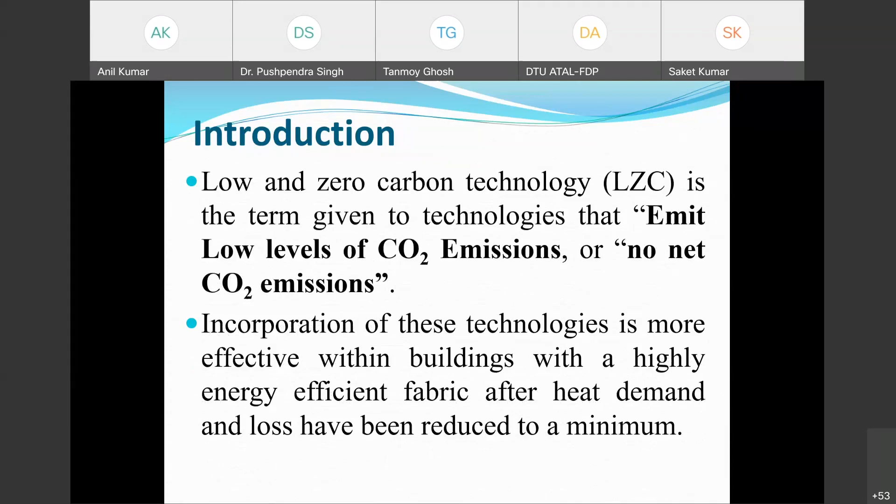Low carbon power is electricity that produces substantially lower greenhouse gas emissions than conventional sources. Renewable or green energy sources, including nuclear power, are all fine for low emission purposes, whether it is solar energy, biomass energy conversion, wind energy, or whatever.

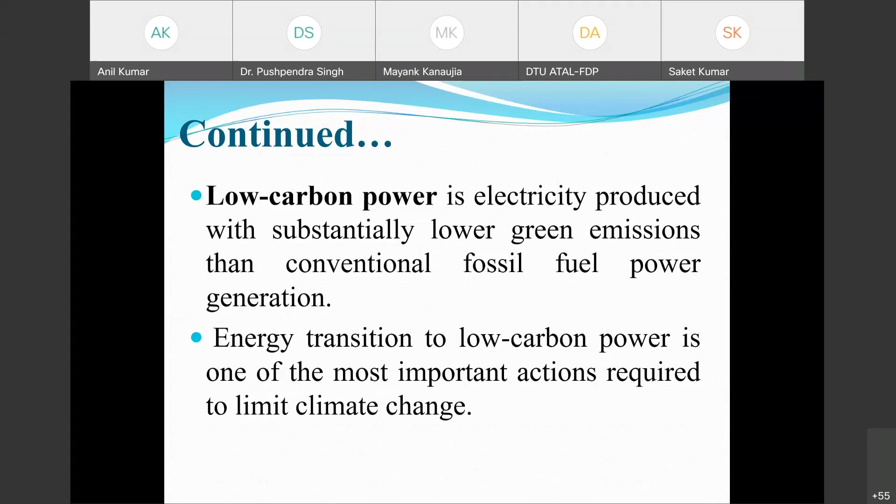Energy transition to low carbon power is one of the most important actions required to limit climate change. There are some definitions: zero carbon technology, carbon neutral technology, and low carbon technology. In the initial phase, our focus should be on low carbon technology, where up to 50% or more of carbon emission can be reduced.

The zero carbon technology: a zero carbon technology development is one that achieves zero net carbon emission from the energy used on-site, on an annual basis.

Carbon neutral technology defines technology that emits the same amount of carbon at the point of use as it takes in during its lifetime. Biomass energy conversion technology is the best example, because during its lifetime it continuously converts CO2 into oxygen. When the plant is dead, it emits carbon itself through direct combustion or other techniques, even gasification involves some carbon emission, but it is compensated during its lifetime.

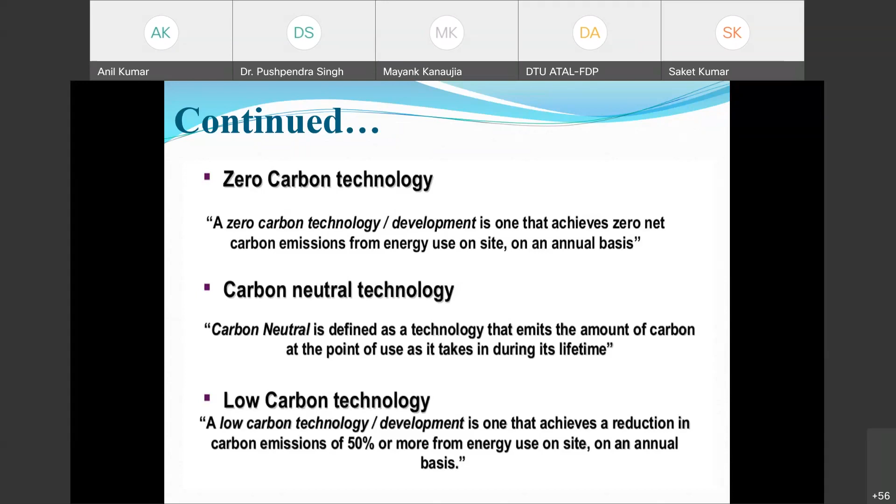Low carbon technology is technology development that achieves a reduction in carbon emission of up to 50% or more from the energy used on-site, on an annual basis. This target can be easily implemented or achieved.

Some examples of zero carbon technology: solar energy conversion technology, whether the solar thermal route or the solar photovoltaic direct energy conversion route, wind energy, ground source heat pumps, and hydropower.

We can consider these zero carbon technologies, but in actual practice, embodied energy is associated with manufacturing the device itself—whether it's the solar energy conversion device, wind energy conversion device, ground source heat pump device, or hydropower turbines and other equipment. A lot of energy is consumed during the manufacturing of their different components, so we cannot ignore that.

For example, take solar water heating systems. They have different components: an energy storage unit or tank, and a solar flat plate collector, which could be focusing or non-focusing type. The flat plate collector is a very well known technique for solar water heating, and you may see it on rooftops along with solar photovoltaic systems in hostel buildings, commercial buildings, hotels, or hospitals.

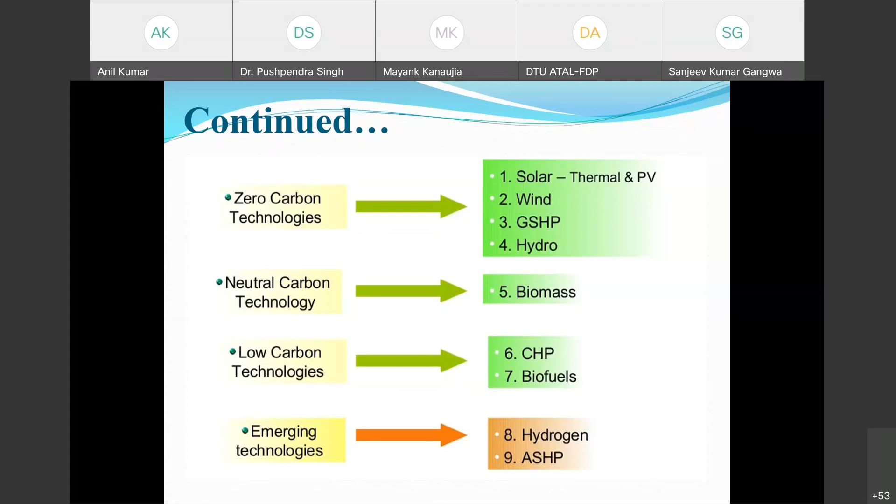And this technology worked in ancient buildings itself, 200 or 300 years back. The kings in the palaces implemented this technology. Air tunnel cooling systems are provided in the Jaipur palace, and many more palaces in India, and also in other parts of the world.

So now, low carbon power generation sources include wind power, solar, nuclear, and most hydropower. Of course we consider this low carbon power instead of zero carbon power, because in hydropower a huge amount of energy is again involved during construction of dams, and rehabilitation, and the ecosystems are also disturbed.

I remember the Tehri Dam hydropower project. It was started in '74, but the first commissioning of the first unit was only in 2004, so it took more than 25 to 30 years. Because of some social movements, like the Sundarlal Bahuguna movement and other environmentalist movements, and the gestation period being very high, initially only 10,000 crores were sanctioned, but how many multiples of that 10,000 crores were spent during construction, we don't know.

The term largely excludes the fossil fuels or conventional fossil fuel, coal, and other fossil fuels also as a plant source, and is only used to describe the particular subset of operating fossil fuel power plants, especially those that are successfully coupled with flue gas carbon capture and storage systems. This definitely helps a lot in reducing carbon emissions in conventional systems.

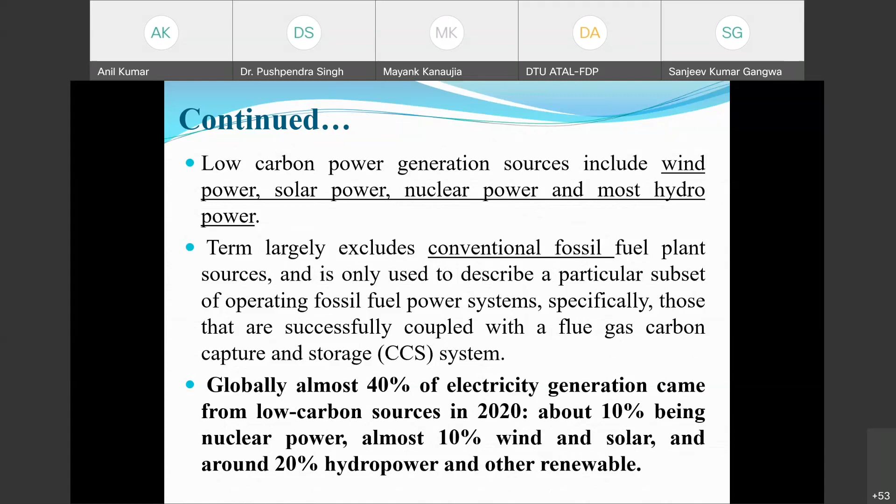Energy production and use accounts for about 3/4 of the globe's greenhouse gas emissions, making it the most important element for the net zero emissions strategy for many countries. There are three main strategies which can help a country meet its energy demand with zero carbon emission: optimization, electrifying, and decarbonization. These are the three things.

All countries need to do it - reduce the energy use through improved efficiency. So we have to improve the energy efficiency.

Now these days, you might have noticed some star rating is there. In India, the BEE is responsible for that - 3-star, 4-star, and 5-star ratings are there. This star rating is basically about energy efficiency only.

Shifting energy demand to electricity and away from the combustion of fossil fuel is electrifying. Shifting entirely to zero carbon technology to generate electricity is decarbonization. These strategies are needed in all the major energy using or energy demanding sectors - building, transportation, and industry.

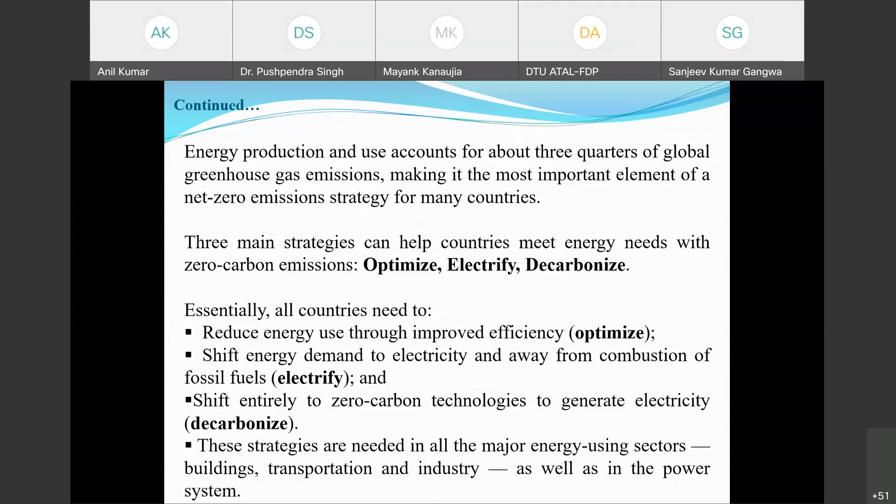Now there are some important factors behind decarbonization: investment in energy efficiency. A good amount of investment is needed for energy efficiency, because if we want to improve efficiency for domestic use, we need to replace many old products. And many times we have to take care of our economic condition also.

Hydropower and investment in non-hydro renewables - this large capacity hydropower system is again somewhat problematic, but small scale or mini-micro level hydropower is fine, which we can do with minimum investment.

This investment, or say the energy for the construction of a big dam, means cement is needed, iron is needed. These are in another way just the energy form of some energy itself.

Growing wealth and economic modernization lead to electrification of the energy sector, because energy demand keeps on increasing day by day. Just look at your domestic level itself. Now almost all medium class families have a microwave oven, but 15 years back it was not there. All medium class families have a mixie or mixer grinder in their home, and many more home appliances are now totally dependent on electricity, because electrical energy is a more convenient form of energy.

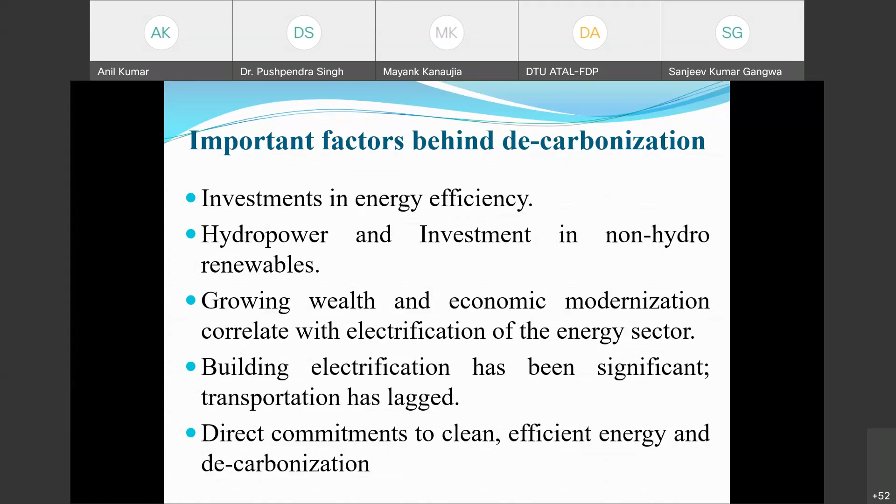Another very promising technology is solar desalination. It is used to desalinate water, and that water you can drink after mixing in some minerals, so that we can use it. This is the low carbon philosophy, and all the literature reflects it.

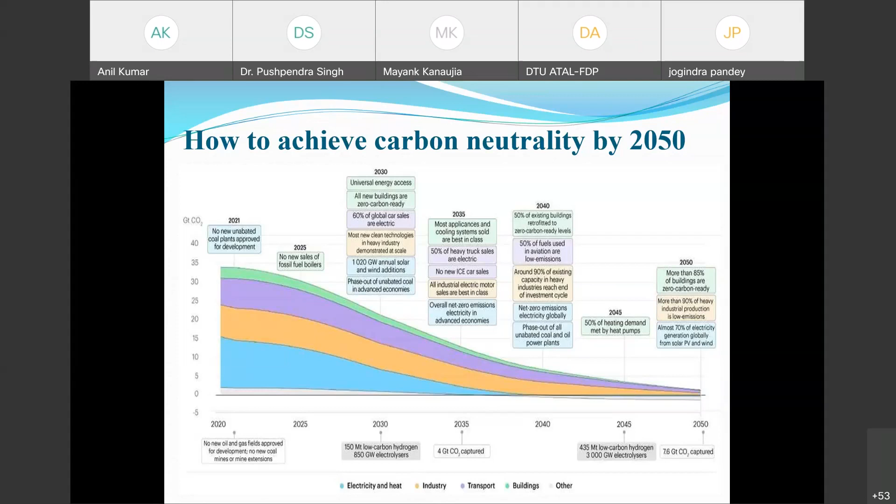In many countries, this has already been implemented, and governments are running phases of the low carbon emission technology program. Basically there are three phases. So the low carbon emission technology program includes three phases to promote the transfer of low carbon technology.

First, develop selection criteria to initially identify and screen technology that could be replicated and have repeatability demonstrated. Conduct a feasibility study to identify the LCET based on current technology and socio-economic needs. That is very important. We have to take great care, before implementation of any technology, of the techno-socio-economic needs and study thoroughly how it will impact society.

One research paper we have written has already been accepted, in energy social science. There we studied the impact of the CSP system on society and how these are being distributed, so it is in the production phase. One of my UG students did that study, and it is a very nice study with good impact factor, and it has been published.

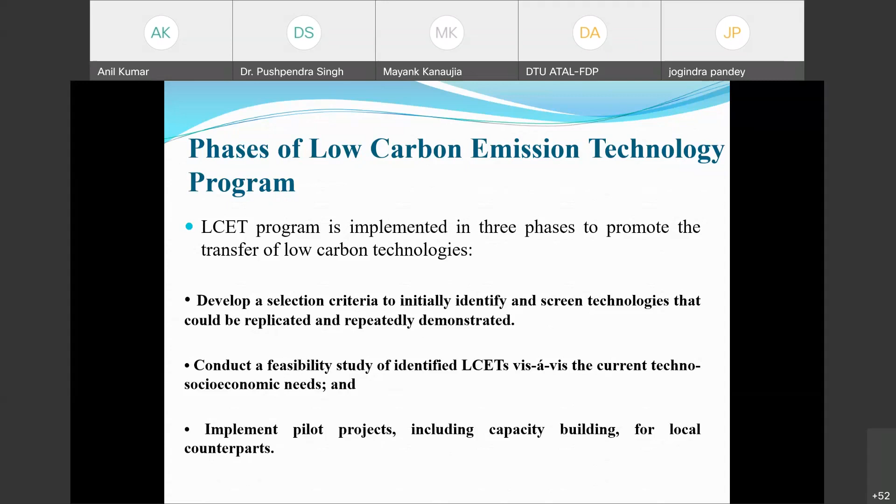So implement pilot projects, including capacity building at local counterparts, especially in buildings, how we can implement this zero carbon technology. We need to use technology in buildings so that CO2 emission gets closer to zero. There are a number of technologies that can heat buildings and emit low carbon.

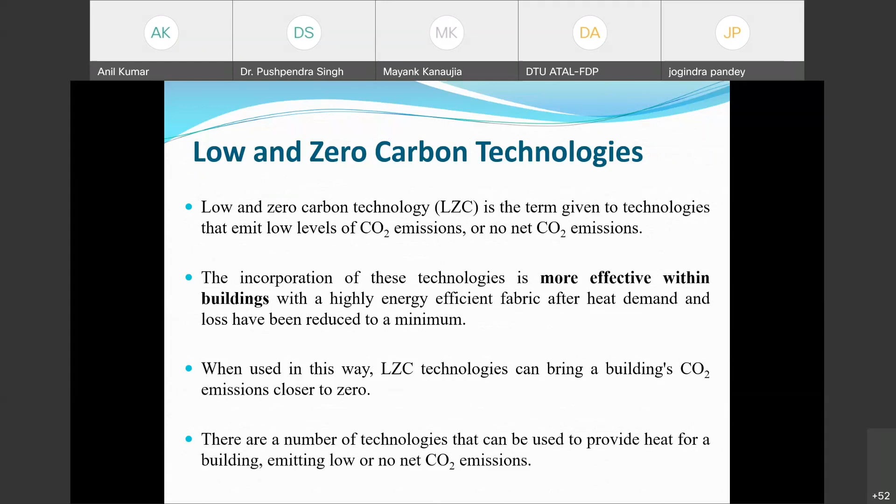Now the solar water heating system, I already gave this example, and in India, a tropical country, we may not need hot water for domestic purposes. However, in hotels, hospitals, commercial uses and industry itself, hot water is needed round the clock. So that hot water can be achieved with the help of solar energy, and solar thermal technologies are the best for that.

Air source heating, ground source heat pumps for heating and cooling, and not only heating and cooling but also for power production. Organic Rankine based cycles are there, and we have published few papers on low temperature based organic Rankine cycle power generation. We are also studying this for some hilly regions, and one of my students is doing modeling work for this heat pump.

Combined heat and power is another very important technology, implemented since the last decade, and it makes the system more and more efficient, closing to 90% or 95%, because both heat and power are utilized.

For biomass heating, we have efficient gas boilers, that is fine, the gas boiler from biomass. Biogas, this is what is called the anaerobic digestion system. And solar photovoltaic system for direct energy conversion.

Help of the ground, very good design, ground source heat pump itself. Combined heat and power for the industrial aspect. The biomass heating could be implemented for the domestic as well as the industrial building. Energy efficient building for building.

Solar photovoltaic can be utilized, meaning the roof generally, if we have empty space on the rooftop, we can easily implement the solar photovoltaic systems. And these days the solar photovoltaic system, if some excess energy is produced, that is directly fed into the grid.

So smart metering is there. Whatever the generation is there, that will be directly deducted from your main power consumption meter itself, the metering system.

And this wind turbine on the peripheral wall, or some wall, small turbines we can use, where we can install small turbines. A number of small turbines we can use in the perfect direction. So definitely, though these are small turbines, they could easily replace your lighting load. The wind turbines are sufficient to replace your lighting load itself.

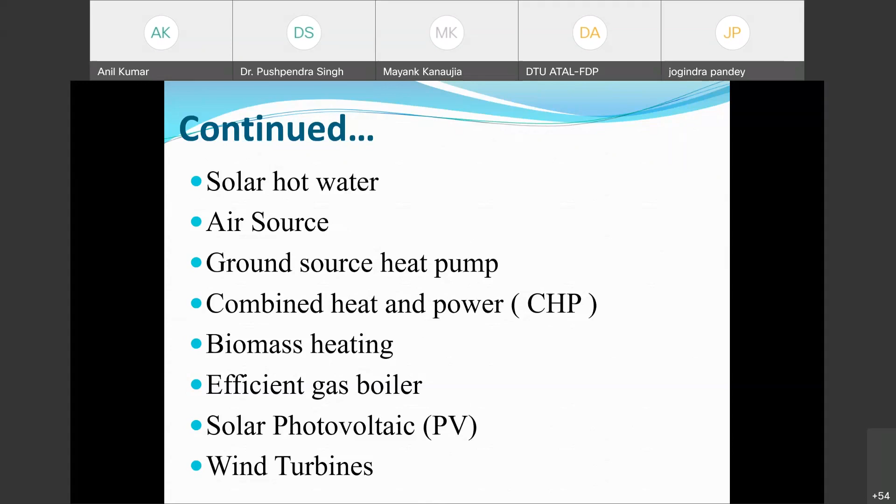So solar water technology, some studies out there. Installation main component, installation consideration, cost.

And 40% efficiency with the evacuated collector. These are able to generate water of 150 degrees centigrade. A little bit more expensive, but more efficient, because the radiative losses are reduced with the help of the two concentric tubes that are there.

So heat transfer system, the hot water system, heat transfer system, or the water pumping, all of that. Most of the systems work on the thermosiphon effect only, thermosiphon based, natural convection based. The hot water cylinder, this is the storage of the hot water system. So these are some of the components.

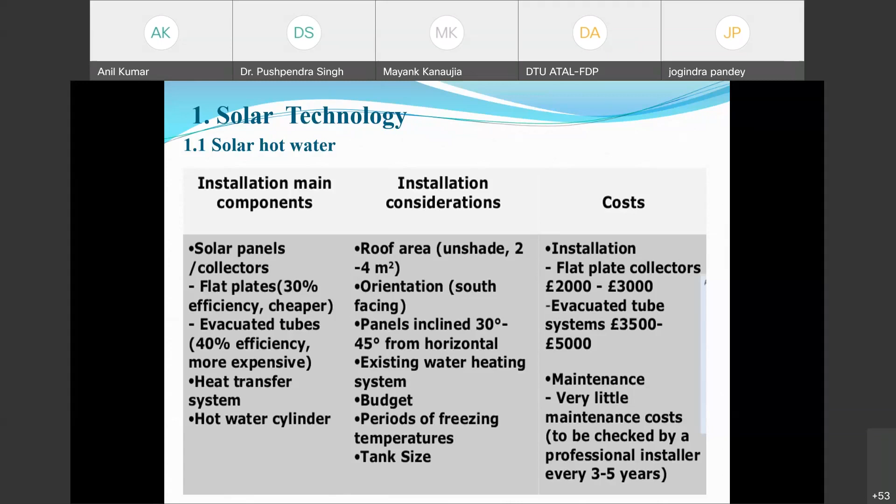Nothing will be changed, only the gasket. Sometimes the gaskets become very hard, and maybe sometimes the glass is broken by monkeys or other negligence, and some leakage could occur. Other than this, there is no massive problem, so we can say the maintenance is very little, maintenance cost is very less. This is one of the perfect examples of zero emission technology for implementation anywhere, whether domestic, commercial, or industrial building.

So this is the same thing. The 50 to 70% of the water heating, which is spread out, approximately 90% is summer and 50% is spring. Lifetime 30, I have already discussed.

Payback period is a very important thing. Over here they have written 7 to 9 years - this is for European countries. But in India this is quite less, not more than 3.5 years, even in extreme cases.

So environmental benefits - of course this is a very important slide. Environmental benefit, the CO2 benefit is 400 to 750 kg per year, the average installation about 10% of average household emissions. And this LCBP, the possible local council grant is defined for this, from the UK point of view.

Solar photovoltaic systems: PV array, inverter, DC-AC conversion, metering, inverters, and solar charge controller if batteries are present - the charge controller.

But you will not believe, 10 years back, or even 5 years back itself, for solar photovoltaic systems the battery was a very essential component. And the cost of the battery was around 35% of the total cost of the system.

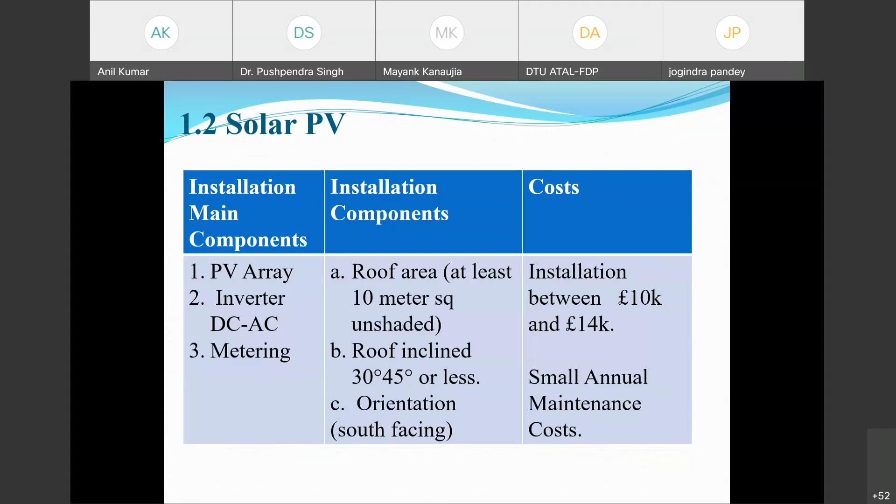And of course, there is no maintenance unless some breaking occurs, and hot spots generally are there - though now hot spots are also very rare. Earlier it was a very common thing because of overheating, but now it can be bypassed. The same system can keep working. Earlier, if a hot spot was generated in some solar photovoltaic module, we had to replace the whole module, but now it can be bypassed easily.

1 kilowatt peak - generally solar photovoltaic systems are measured, the capacity is measured in watt peak. If a 1 kilowatt power generation system is installed, it will generate 1 kilowatt of power when the solar radiation value is 1000 watt, and the ambient condition must be around 25 degrees centigrade.

Another very important thing is air mass ratio - it must be 1.5 AM. So under this condition, the solar photovoltaic system will generate 1 kilowatt of power. So that the smaller system available will produce 750 kilowatt hours of electricity.

Though the power is generated, the 1 kilowatt peak capacity is there, but there are some losses also, some leakage losses also. So 25% you can consider the losses. So net energy at the terminal.

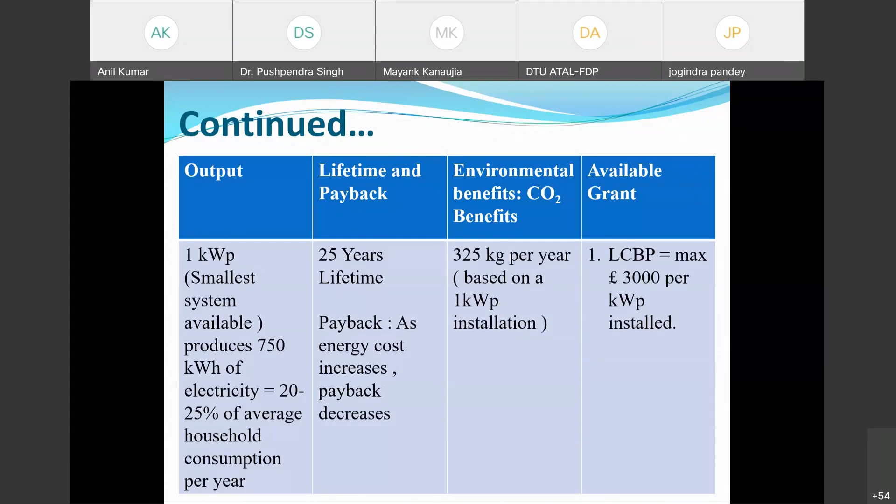This is for UK for the current. Now the wind energy, another installation: the wind turbine, mast, inverter, battery storage, off-grid system. Installation consideration is average wind speed must be 5 to 7.5 meters per second. And now there are some turbines available which can work at 3 to 5 meter per second also.

Planning issues: visual impact, noise, and conservation area. This is another very important thing with wind energy. Some ecosystem disturbance is there because of visual impact and noise. They are also responsible for bird killing, and possible building survey issues due to increased pressure on the fabric of buildings.

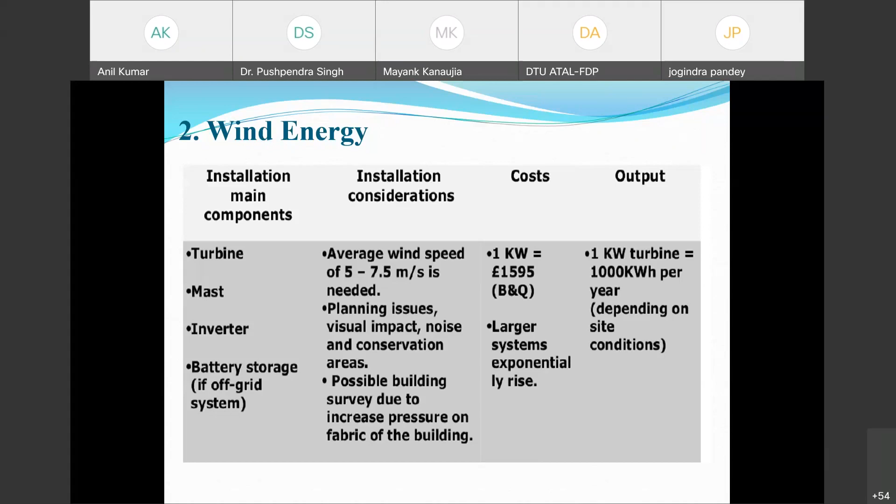So that is the cost, and for the largest system it rises exponentially. A 1 kilowatt turbine produces 1000 kilowatt hour per year, depending on site conditions, so that is availability of wind. Lifetime and payback period: lifetime is again 20 years, and payback is unlikely to cover the full cost during the lifetime, but likely to improve with energy cost rise.

Environmental benefits are also there: 0.5 tons per house per year, meaning over 20 years, suppose the system cost and system life is 20 years, so this much carbon can be reduced.

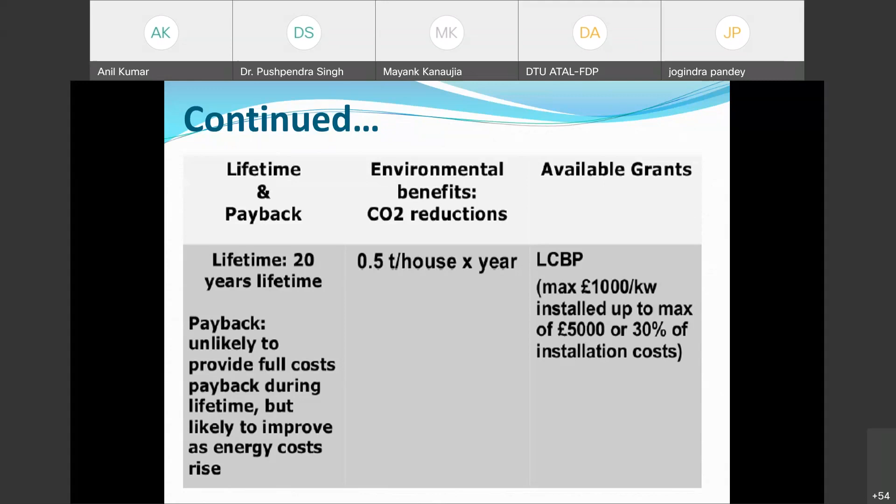Ground source heat pumping systems are also another very important option for heating and cooling potential. The ground installation and main components are the ground loop, and deep bore drill, which could be vertical or horizontal type. The heat pump contains the evaporator component, compressor, condenser, and the heat distribution system under the floor or standard radiators.

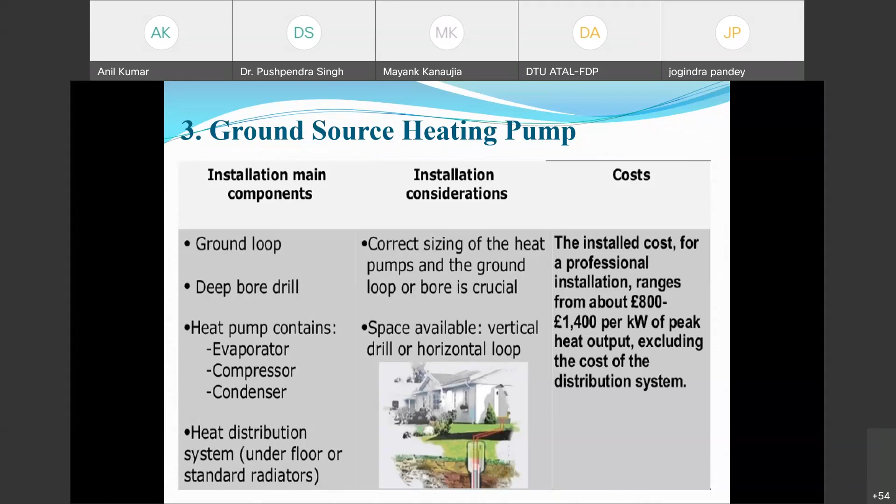Correct sizing is an important installation consideration. If the heat pump is oversized, then the cost and energy consumption will be higher, so we have to optimize the sizing. Also, the ground loop or bore is crucial, and space available for the vertical drill matters too.

This is for full house heating under the floor, and floor heating is more efficient than radiators. The life is 25 years, payback is 9 to 10 years. But in India, because we have very favorable conditions, the payback period is quite less, meaning 6 to 7 years over here.

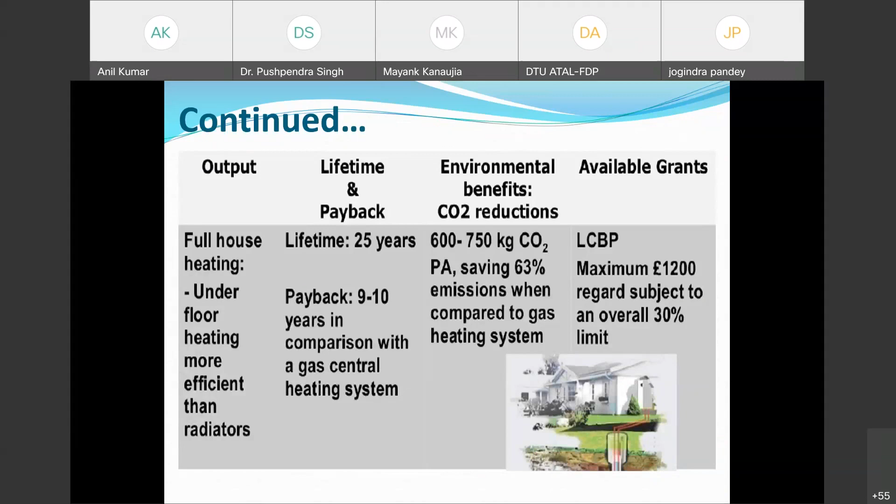Environmental benefit: 600 to 750 kg CO2 per annum saved, 63% emission reduction compared to gas heating. In European countries and most countries where the temperature is very low, they use gas heating systems, and compared to that, almost 63% emissions is reduced.

So small hydro: again, this is average worldwide, 100 kilowatt cost around this much. No CO2 emission at all. In lifetime, you can see the life of the dam is more than 35 years. So overall, you may consider there is no CO2 emission with small hydropower.

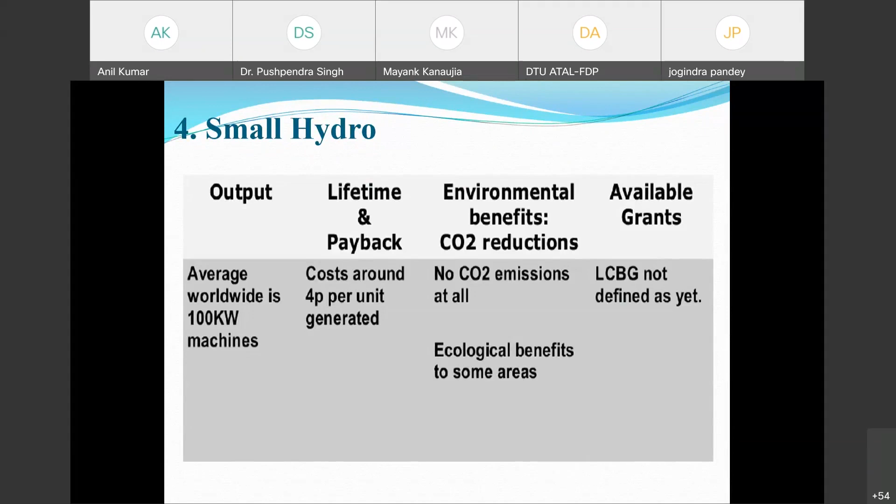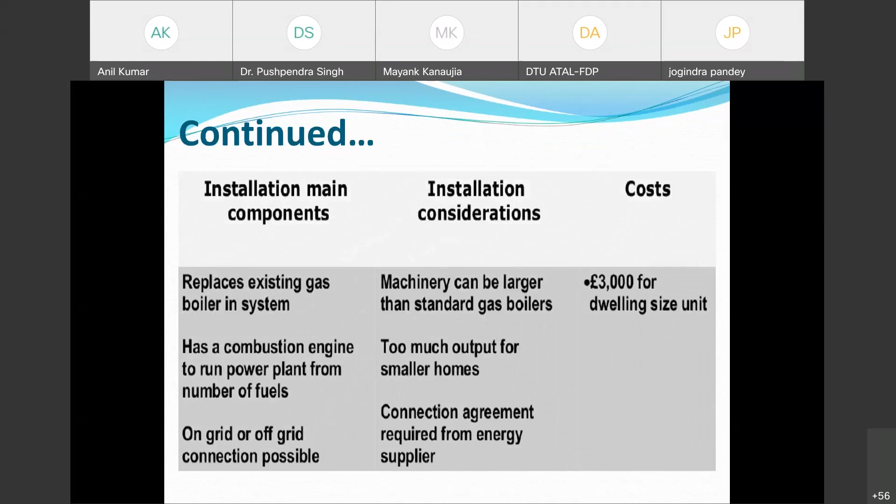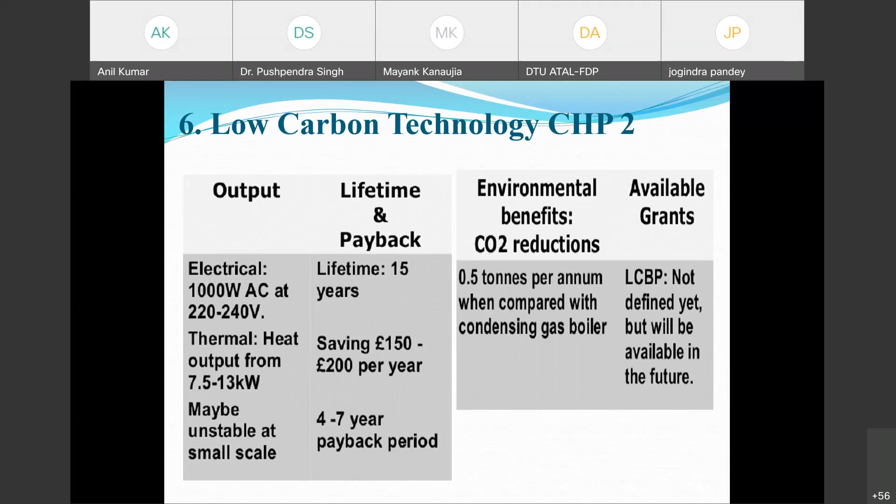I should skip some slides because I want to say some other things now. These are all basically important.

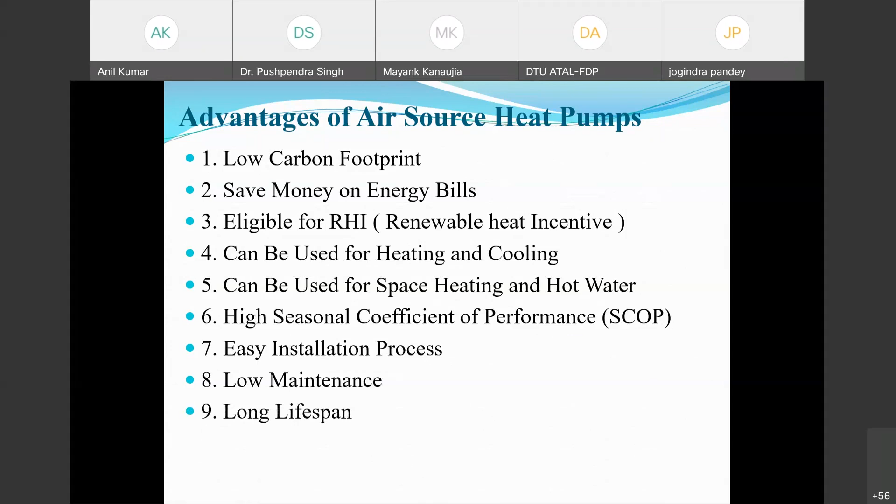Air source heat pump: low carbon footprint, saves energy and energy bill, eligible for the renewable heat incentive, which can be used depending on government policy. Renewable heat incentives can be used for heating and cooling, for space heating or hot water, high seasonal coefficient of performance, easy installation process, low maintenance, long lifespan, no fuel storage needed.

This methane itself, the methane from this anaerobic biogas digestion process, that you can generate.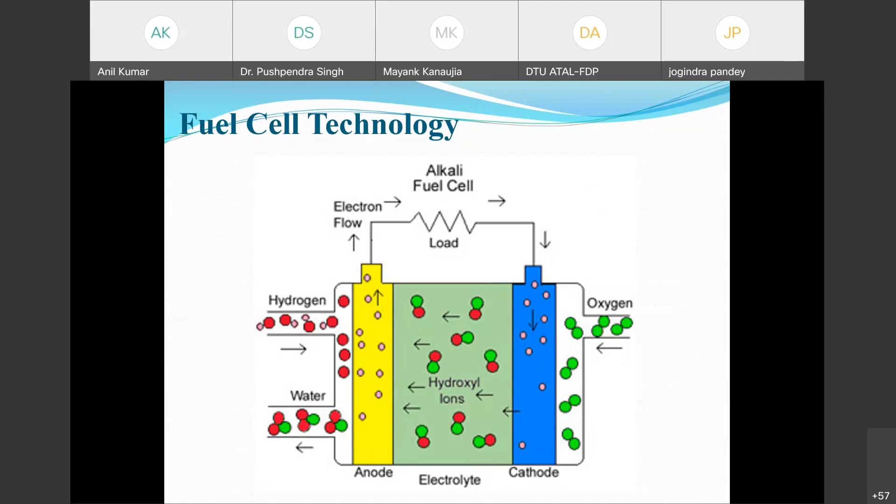Sooner or later it will be opted, because these are all low carbon technologies, right?

Now the question comes: India is a developing country, and not only India, many African countries and many more Southeast or South Asian countries need huge amounts of electricity, basically energy needs, because we are in the developing stage, right? Let's just look over here.

This was the installed capacity at the time of independence, in 1947. We were generating power of 1360 megawatts only, for 30 crore people at that time.

But now there are more than 130 crore people, and right now our power generation capacity is more than 3.5 lakh megawatts. That is our installed capacity right now.

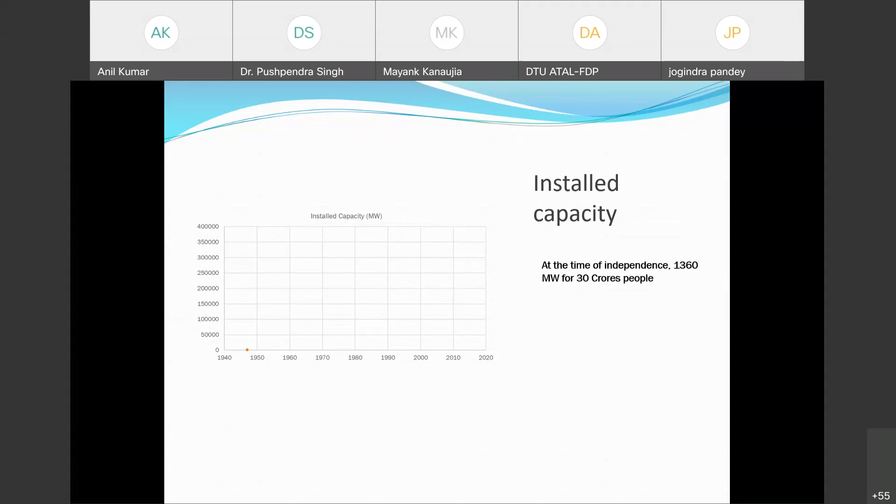So now how is the pace? The installed capacity has increased from 1947 to 2020. In fact, this is very recent data: 3,83,373 megawatts is the installed capacity we have as of May 2021. So that is basically exponential growth.

And this growth is because of the development only. So if someone says we have not developed in the last 70 years, I think that is not a proper statement.

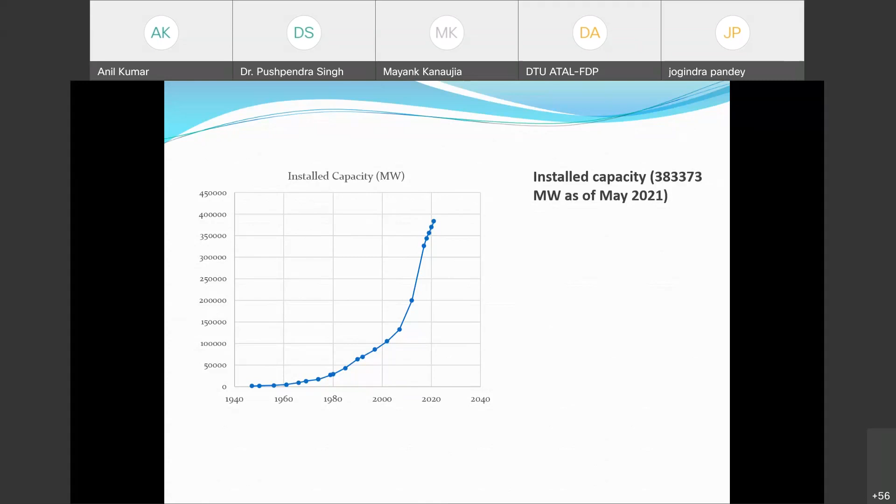Because energy demand keeps increasing, our installed capacity keeps on increasing. Demand is increasing not only in the domestic sector but also in the industrial sector, and more than that in the industrial sector itself, it is one of the most energy demanding sectors. So our nation's growth highly depends on industrial development only. All the modernization is because of our industrial growth only.

Now just look over here. This is the installed capacity of various types of power plants: coal and lignite 53%, gas 2%, diesel 6%, hydro power 2%, nuclear 12%. And RES now has quite a respectable figure, 25% of the total installed capacity.

But in the next slide you will be a bit disappointed. Though the renewable energy installed capacity is 25%, in actuality we are generating only 10%. Less than 50% of our installed renewable capacity is actually being generated. This is quite disappointing, and it's because of the low power factor, which includes maintenance. We do not do proper maintenance for the renewable systems. This is another problem.

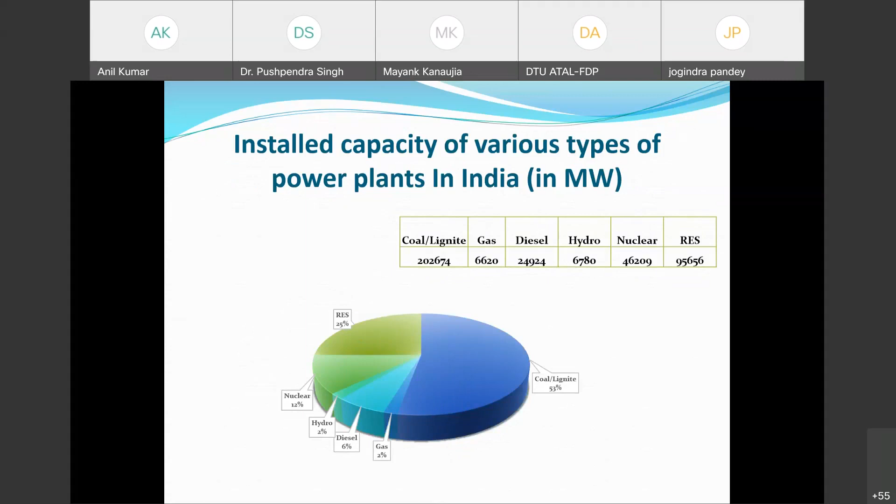This is the power generation in gigawatt hours, while that was the power generation in megawatts for installed capacity. So the coal and lignite share is almost 72%. Just look over here: the coal and lignite installed capacity is 53%, but the actual power generation percentage is quite high, at 72%. That shows how dependent we are on coal or fossil fuel, coal or lignite based power.

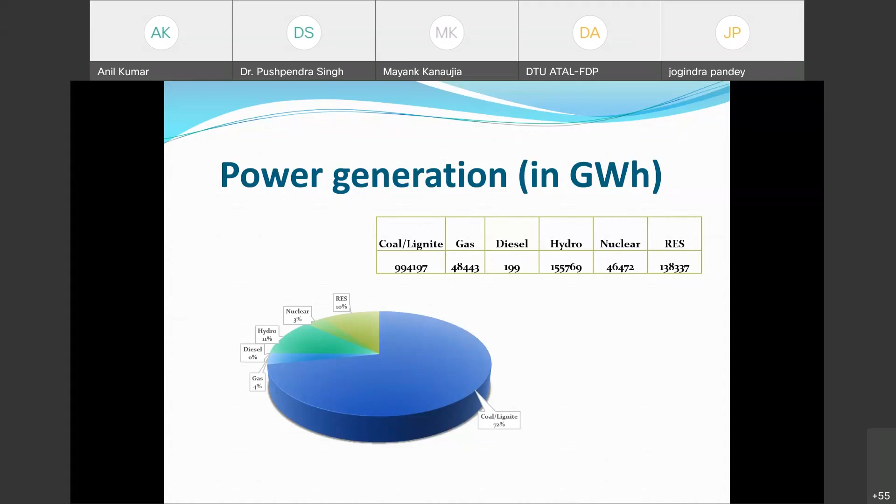Because of that reason, I was saying we cannot replace coal-based power plants with renewables or any other green energy, because though nuclear energy is quite a promising energy source, the safety concern is there. A lot of safety concerns are there. That is another problem with this.

Now you just see this is the growth in per capita electricity consumption, right?

At the time of independence in 1947, we had only 13 kilowatt hour per capita energy consumption. But now it has reached almost 1200 kilowatt hour, as of the end of October 2020. Of course, our population has also increased proportionally, but it's still quite a satisfactory figure. Though we should have more than that to come under the category of a developed country, we definitely have to increase the per capita energy consumption.

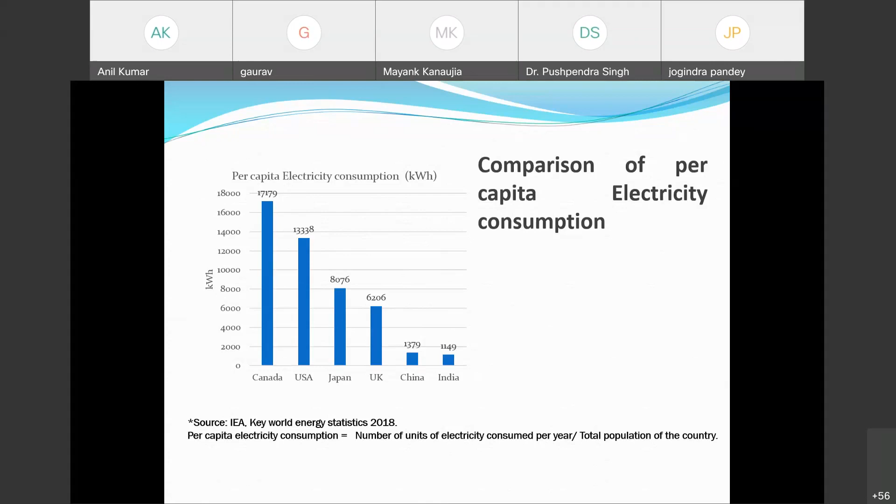Of course there are problems: emissions of greenhouse gases, acid rain, general destruction to the environment. A 500 megawatt plant will produce 10,000 tons of sulfur dioxide, 10,200 tons of nitrogen dioxide, and 3.7 metric tons of CO2. So we have to take care of all these concerns before adopting coal.

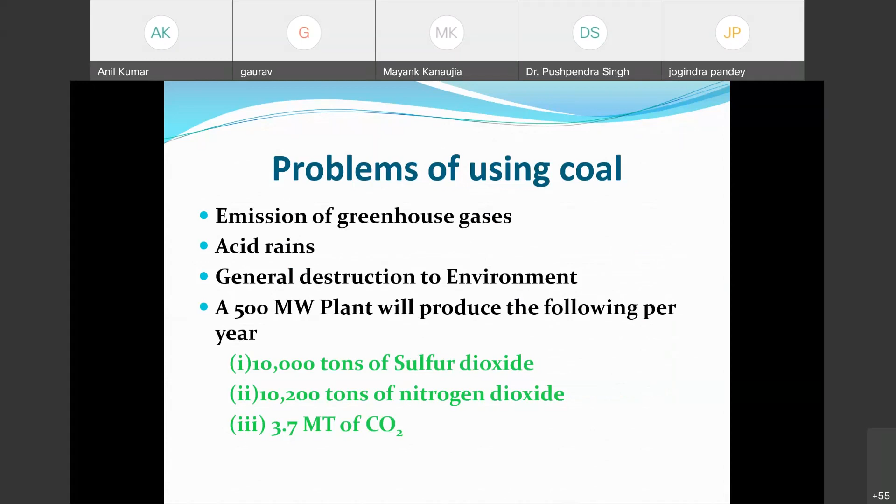In India, thermal power plants emit 1,646 metric tons into the atmosphere. Some regulations are also there because of international pressure, because of the Paris Climate Change Agreement, and the Ministry of Environment, Forest and Climate Change also implemented some rules and regulations to reduce greenhouse gas emissions. We have to maintain the global temperature.

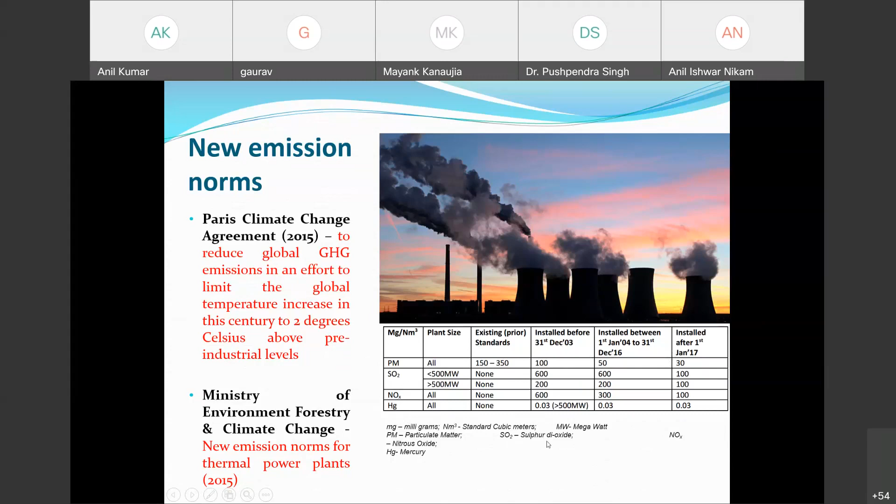Now you can see the difference here: this is the particulate matter (PM), sulfur dioxide, NOx, and mercury vapors, for all plant sizes in 2016-17, compared with before. There are PM levels, SOx and NOx, and some regulations around these.

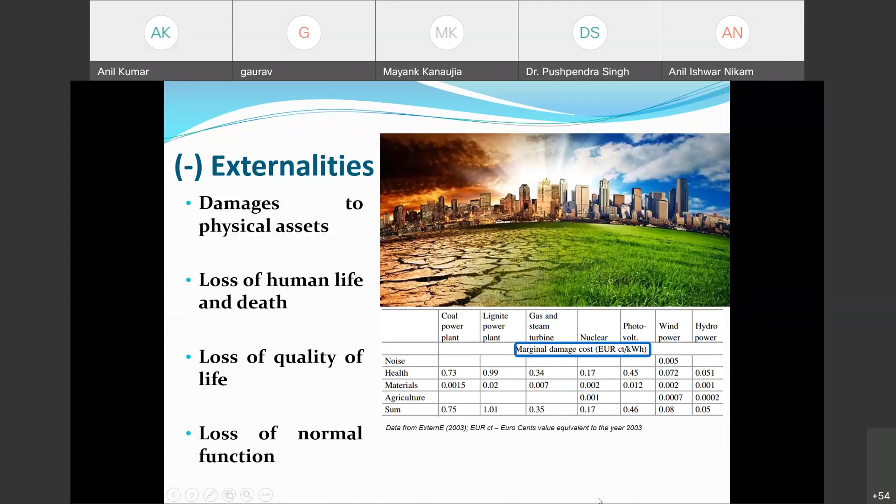Market failure, that is okay. Now the levelized cost of electricity for solar is 2.7 to 3.2 Indian rupees per kilowatt hour. Earlier, I remember about 20 years back, this cost was around 17 rupees per kilowatt hour for solar. So in the last 15 years, there's been a huge decrease in the cost of power production from solar photovoltaic systems.

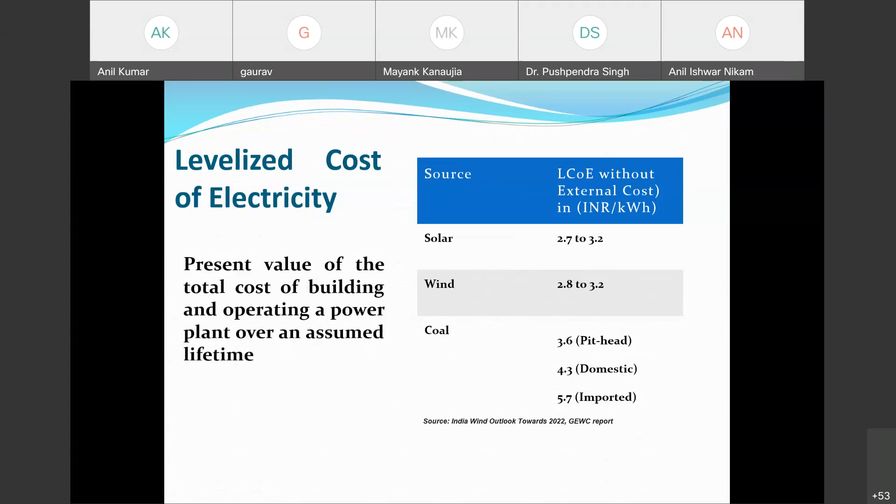It could be the solar CSP or the wind, 2.8 to 3.2. The coal, pit head, domestic and imported - that depends on the pit head, domestic and imported. We are also importing coal from Indonesia or Australia because we do not have good quality coal. Our coal has higher ash content as compared to others - this is another problem with our coal. So now this is how this cost is decreasing.

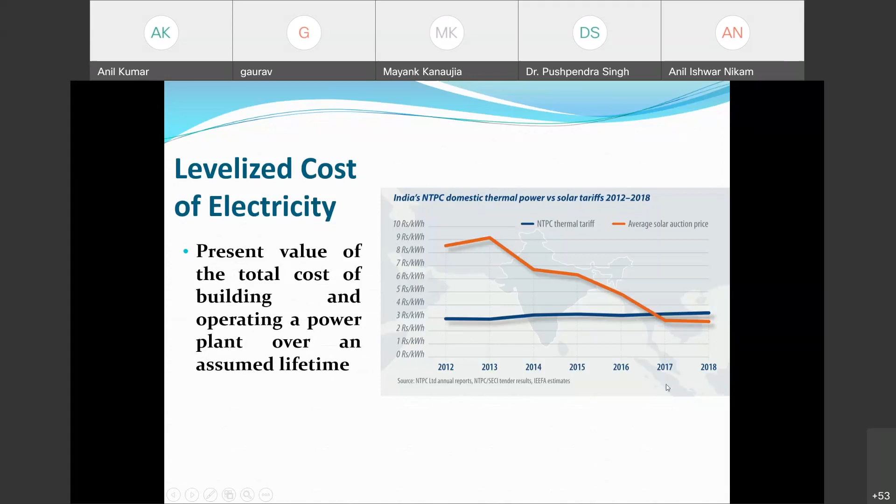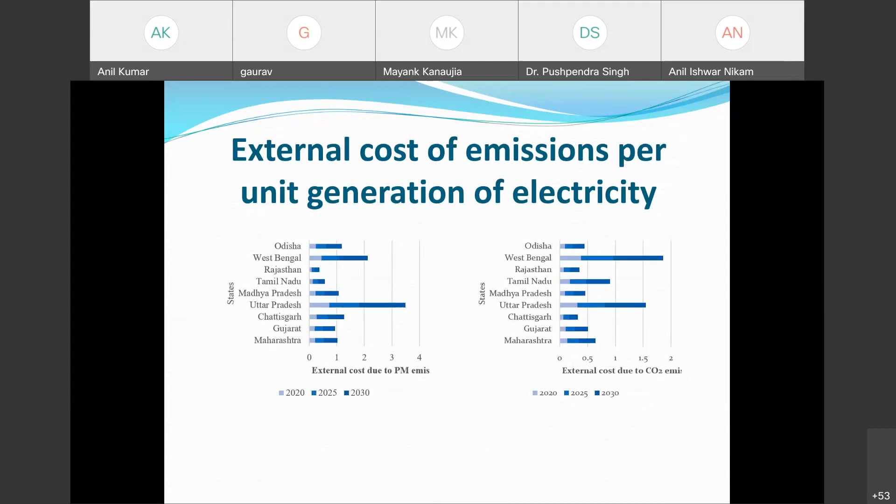So these are the 9 states - this is the external cost of emissions per unit generation in India. The study has been carried out for SOx, sulfur dioxide, NOx, particulate matter, and CO2 emission.

So now the pollution control strategy - solar PV is eco-friendly. Of course, the price of silicon solar cells keeps going down, and because of that, power generation from solar photovoltaic systems is very less costly now as compared to 20 years back.

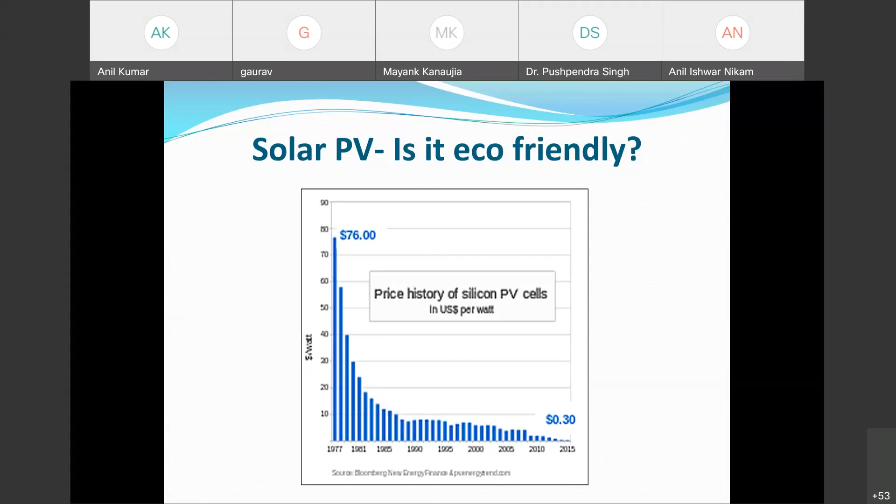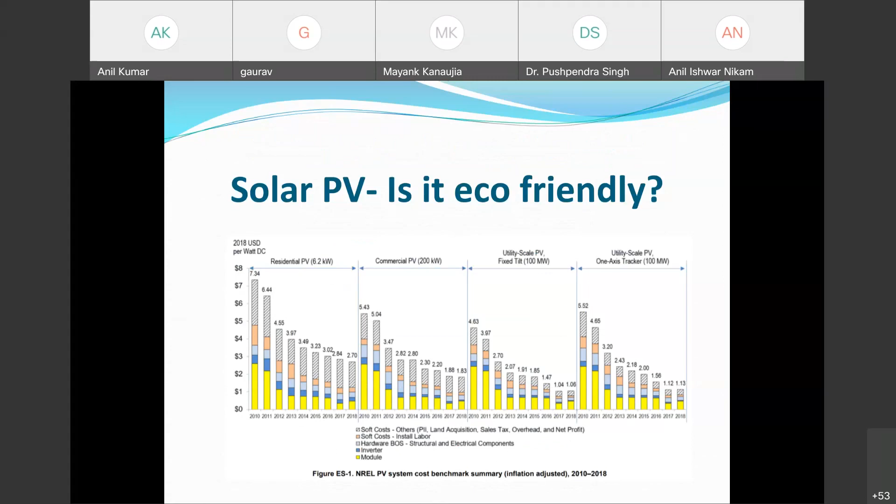Solar photovoltaic system - is it eco-friendly? You may consider this statement only partially correct, because during the characterization or fabrication process, lots of chemicals are released, and that may cause environmental degradation. So this CSP, the concentrated solar power, could be the future of India.

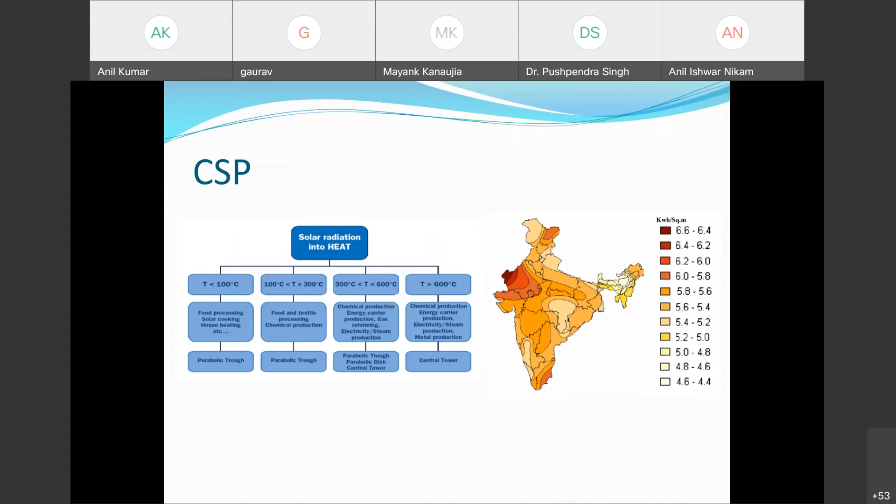So solar panel - is it eco-friendly? Yeah, the solar panel recycling market is also there. 37% of EOL market value is glass, because the materials involved are glass, aluminum, metal, plastic, silicon. These materials can easily be recycled.

So renewable energy, solar thermal - this levelized cost of energy needs to be reduced. High temperature material is to be developed. Definitely at high temperature, material start corrosion is there because of the CSP system - this is a major problem. Some new materials need to be discovered. The efficiency of the unit needs to be increased - definitely in some way we can increase efficiency, scope is there. External cost needs to be considered in the implementation.

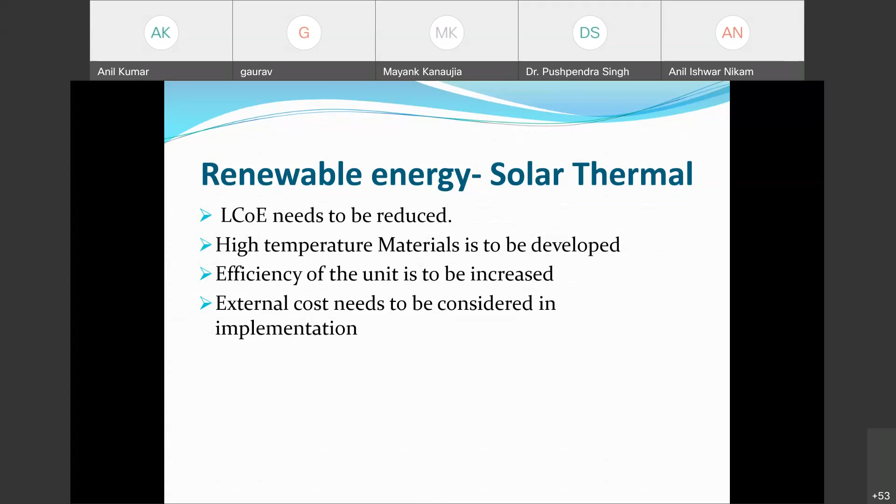So this is the base load - if the base load is more than 12 hours of storage, the CSP cost is like this. 1 cent is equal to 0.7121 rupees.

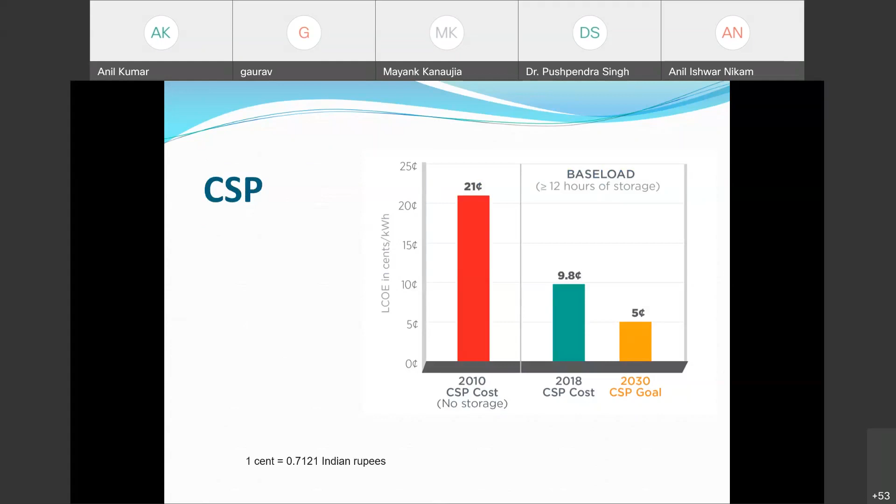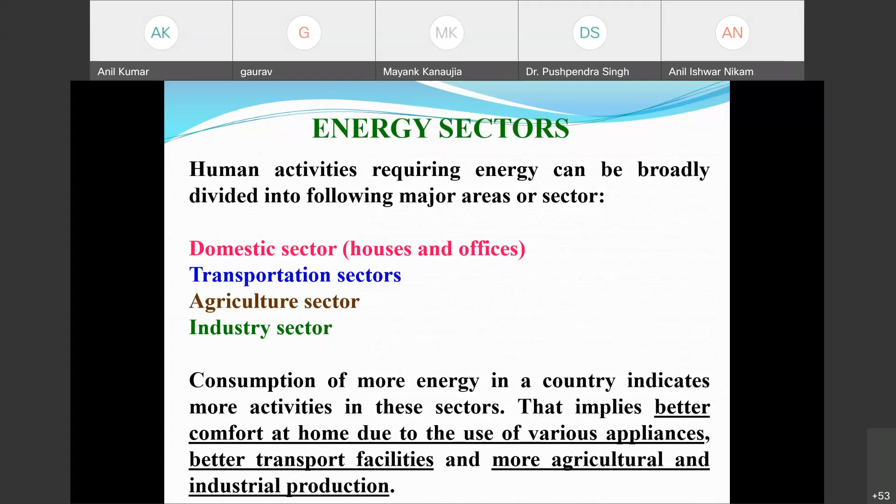In the industry sector, net zero emission means that energy sectors are generally domestic, transportation, agriculture, and industry sector. Just look at the slide - energy is a fundamental input, essential for advancement, modernization, and economic evaluation. This is whatever energy we are consuming for industrial development.

And in the industrial sector, one more important thing - total variation is 28 to 70, and on average we can consider almost 32 to 35% of entire global energy is consumed in the industrial sector.

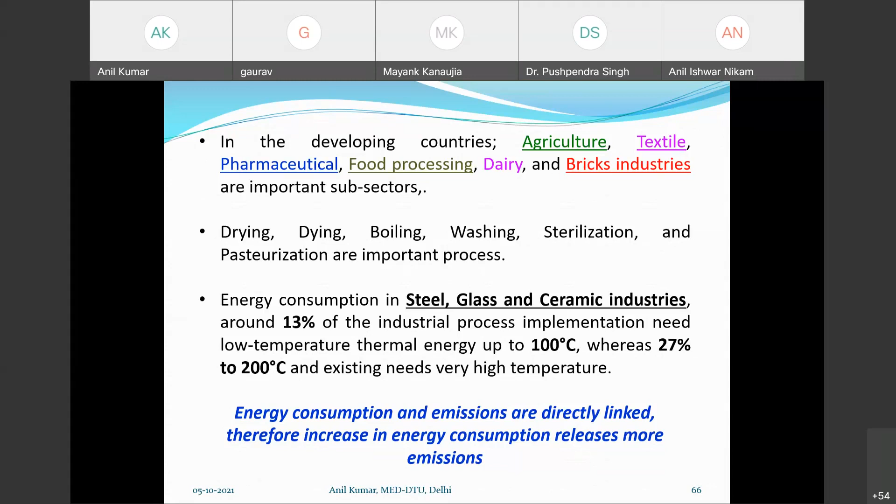Energy consumption in the steel, glass, ceramic industry - around 13% of industrial process implementation needs low temperature thermal energy up to 100 degrees centigrade, whereas 27 to 200 degrees centigrade. So energy consumption and emissions are directly linked, therefore increase in energy consumption releases more emissions, right?

So this I have already discussed.

This is the solar thermal energy conversion system. Everybody knows the collector is there. Storage, definitely - if solar energy is there, we need storage, then only the system could be made more efficient and reliable. If we have stored energy, we can use it as per our demand. And with the help of the boiler, heat engine can be done, or heat rejection, or secondary use, or mechanical energy.

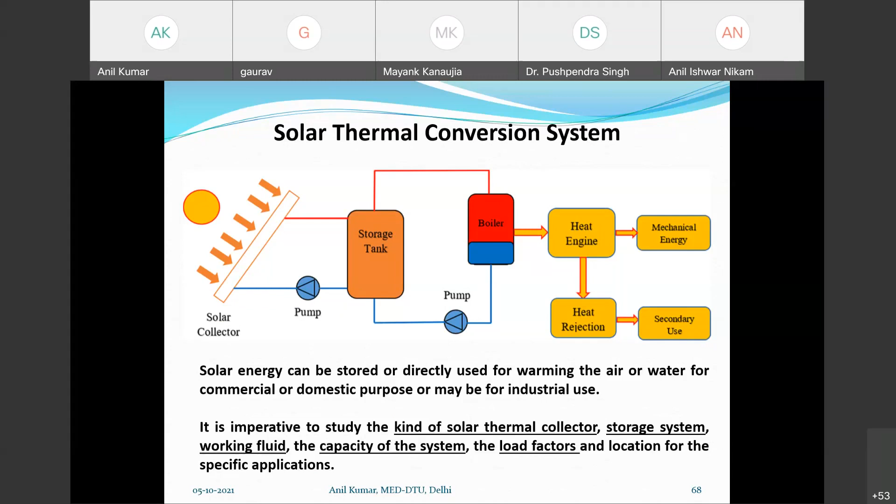That is all. Now this is a very important slide - various processes in different industries where solar energy can be utilized to fulfill the required demand. So dairy, tinned food, paper, textile, chemical, meat, beverage, flour and byproduct, timber product, brick, block and plastic - these are the different industries, right?

And many processes are very same - pasteurization, sterilizing, drying, concentration, the same. Some processes are different too. Paper industry is very energy intensive. Paper, chemical and textile are very energy intensive, but you will not believe none of the operation is carried out at more than 200 degrees centigrade.

Whether cooking, drying, boiler feed water and bleaching - in paper industry the bleaching, drying, fixing and pressing, in the textile industry also, almost none of the process is carried out at more than 170 degrees centigrade.

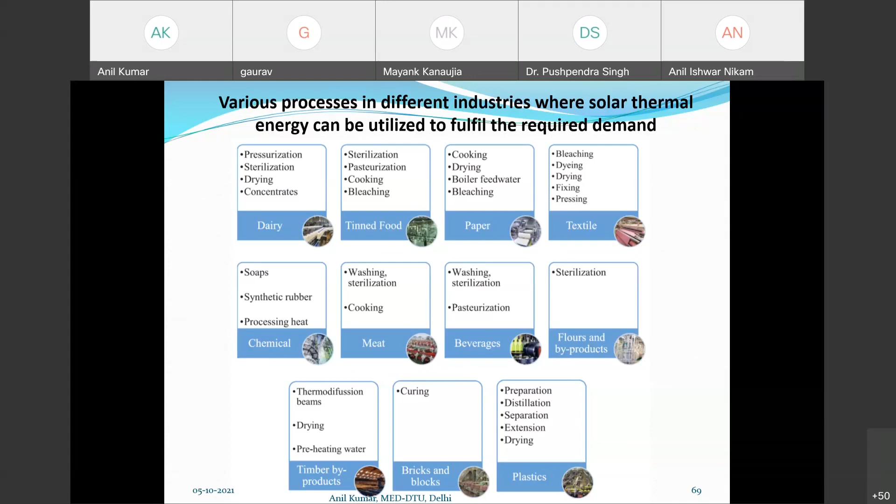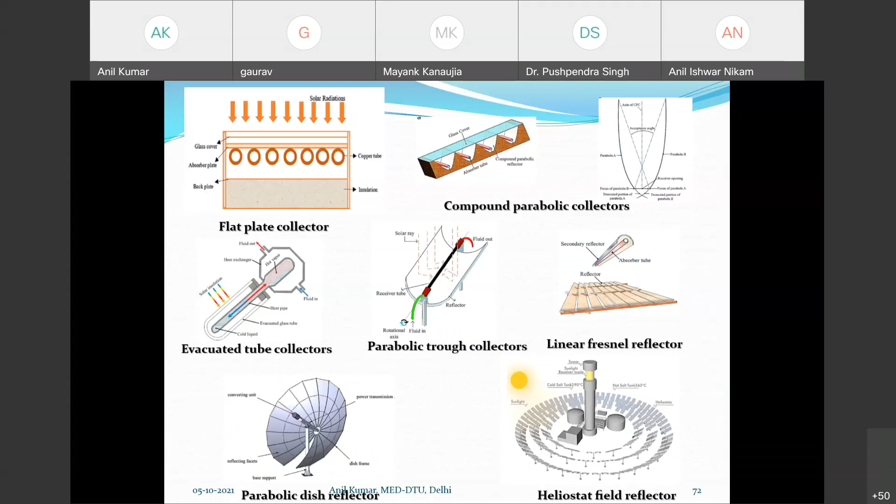I think this is very fundamental, I want to show this slide. With this slide, I just want to conclude.

These are the different solar collector technologies: FPC stands for flat plate collector, ETC for evacuated tube collector, CPC for compound parabolic collector, LFR for linear Fresnel reflector, and parabolic trough collector. So the maximum process demanding temperatures not more than 200 degrees centigrade can easily be fulfilled with the help of either flat plate collector, ETC, CPC, or LFR.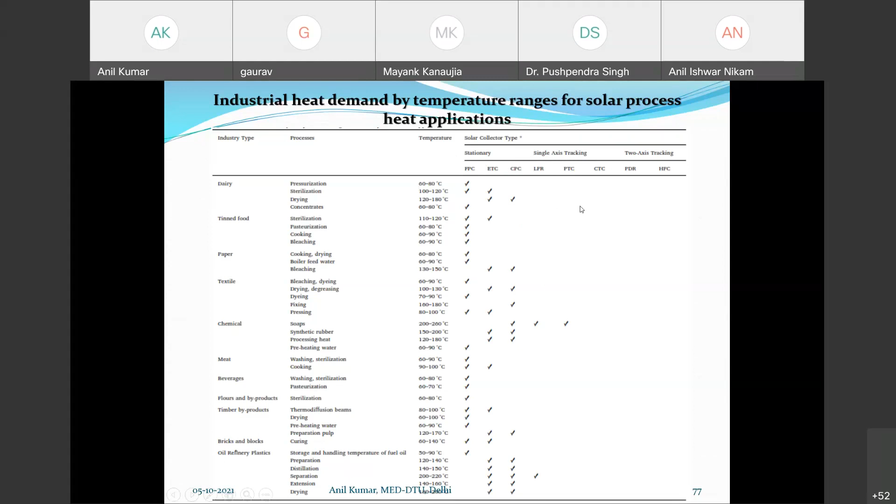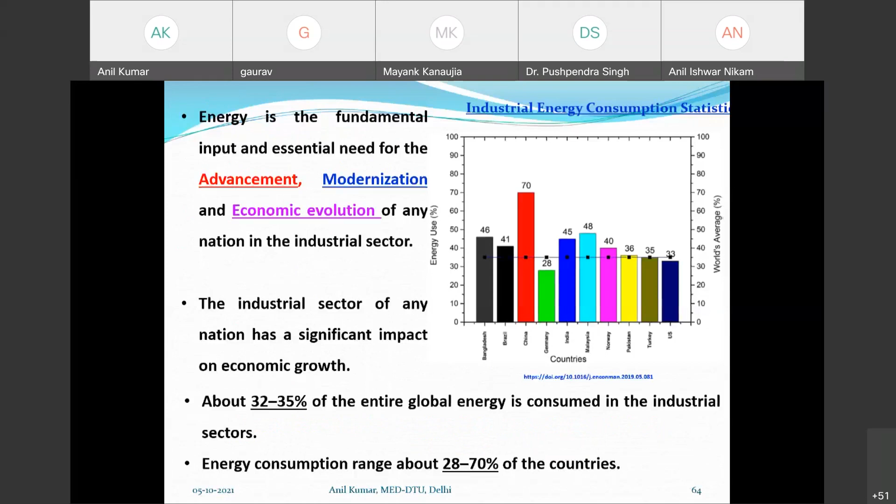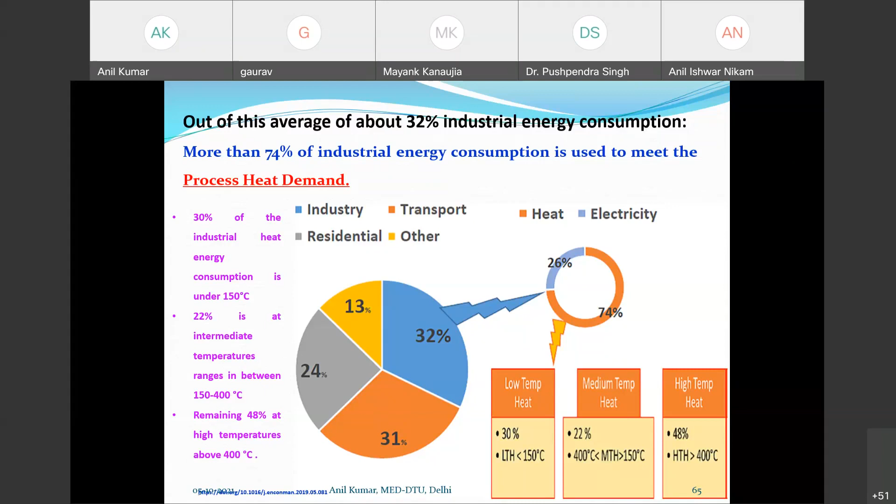As I already showed you in one slide, 74% of industrial energy consumption is to meet process heat demand. So maximum energy demand can be fulfilled with the help of renewable energy sources. We can approach zero energy, zero emission industrial processes definitely with the implementation of these technologies.

I wanted to say some more things, but it's better to conclude now. Solar thermal technology can be used for a variety of industrial applications for sustaining, and not only solar thermal technology but other renewable energy systems are also available. These should be used for industrial applications which are more compatible to be integrated. So this is all about today's presentation. If you have any query, I would be happy to answer.